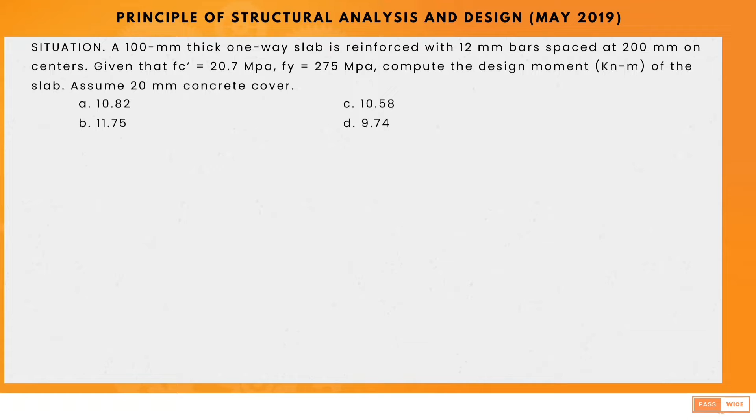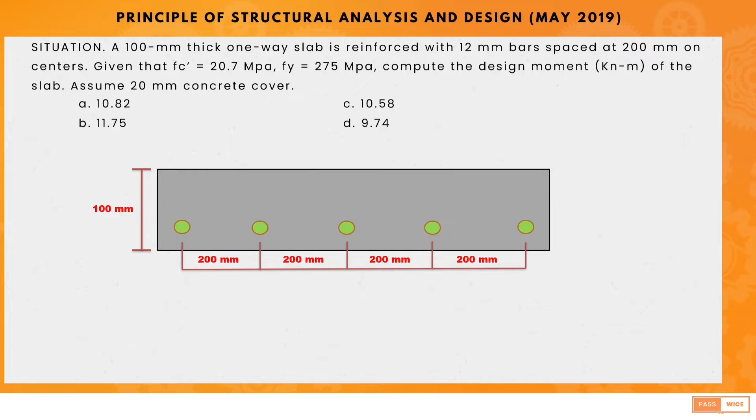So for today's video, we will be solving a problem from Principle of Structural Analysis and Design last May 2019. So this is the situation. A 100 mm thick one-way slab is reinforced with 12 mm bars spaced at 200 mm on centers. Given that Fc prime is equal to 20.7 megapascal, Fy is equal to 275 megapascal, compute the design moment in kilonewton meter of the slab. Assume 20 mm concrete cover.

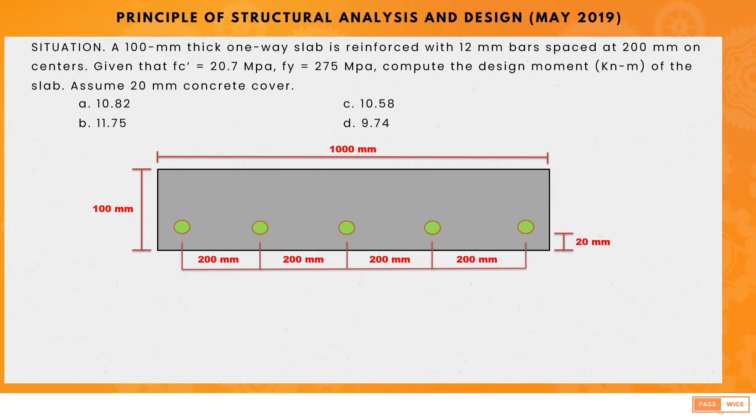Concept check. First concept, analysis of slab is almost the same as analysis of singly reinforced beam or SRB. Second, slab is always tension controlled. Third, nominal moment is equal to Mn. Then, since slab is always tension controlled, design moment is equal to 0.9 of the nominal moment.